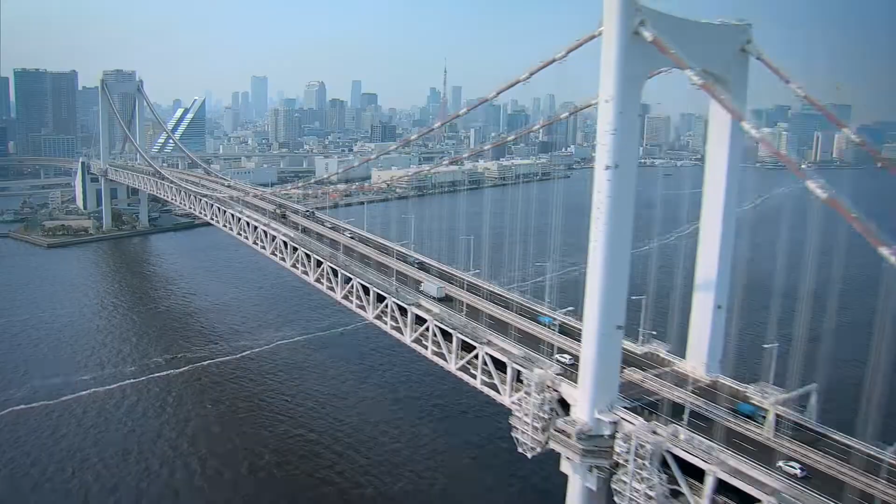Expressways support daily lives in the capital. 1 million vehicles flow in a day. The Metropolitan Expressway is a main transport network for the capital.

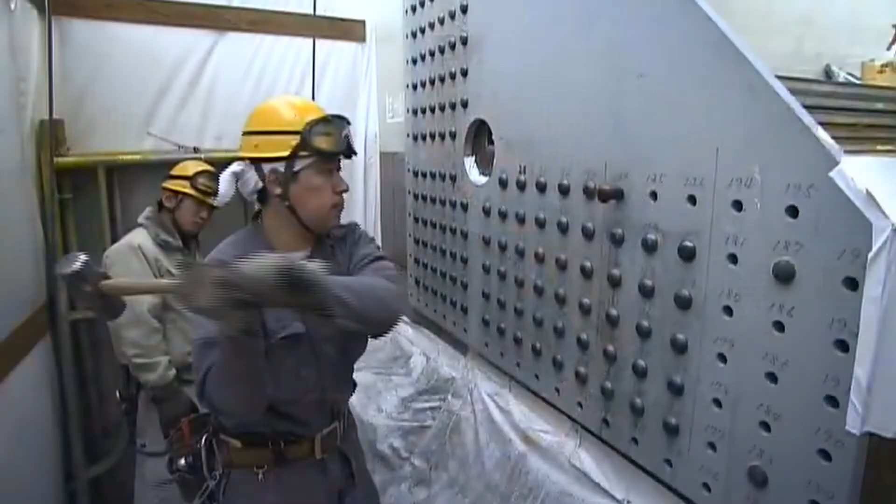The people maintaining the expressway every day are engineering staff. However, there is one more location that helps with the maintenance of the expressway.

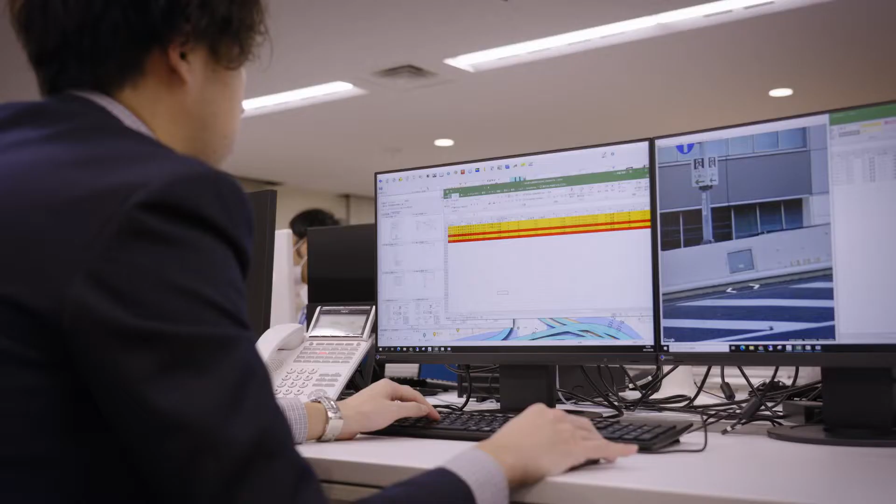Take a look at this normal-looking office. This is the computer system the staff use. On these computers, you can see the expansive network of the expressway.

The system that makes this possible is called iDreams. It offers functions helpful to anybody working in infrastructure.

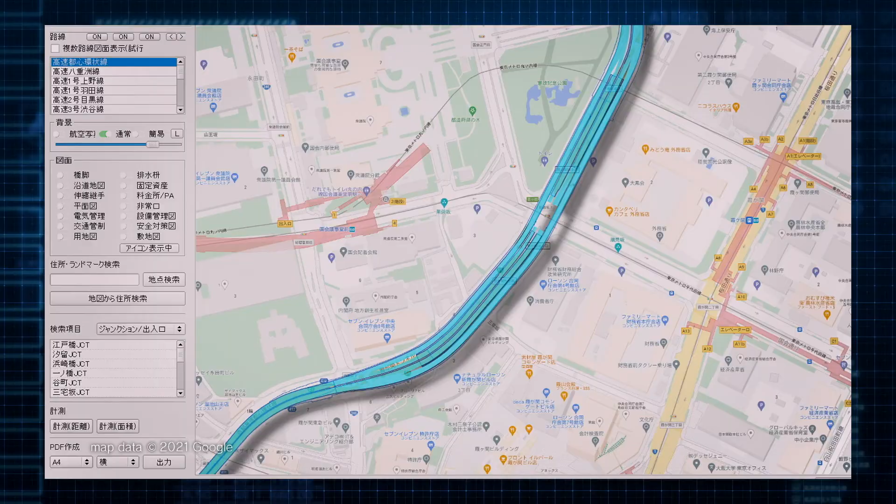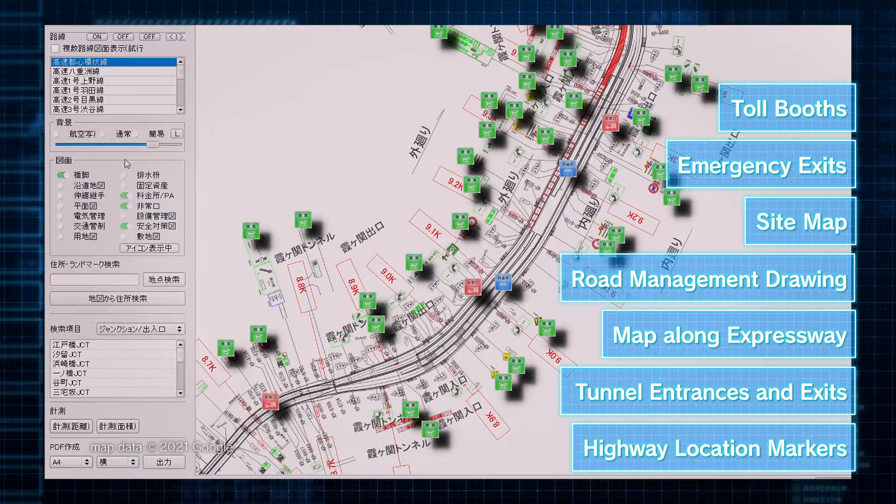With just a click of the map, information regarding damage, among others, are easily accessible. The system contains all information that is required for maintenance work. Let's have the engineering staff show us how this system actually works.

Expressway maintenance requires inspection, diagnostics, repairs, reinforcement, and records. Maintaining this cycle is vital. Each process uses the iDreams system.

Let's look at how iDreams is used for inspection. Mr. Kaneko will be telling us all about it.

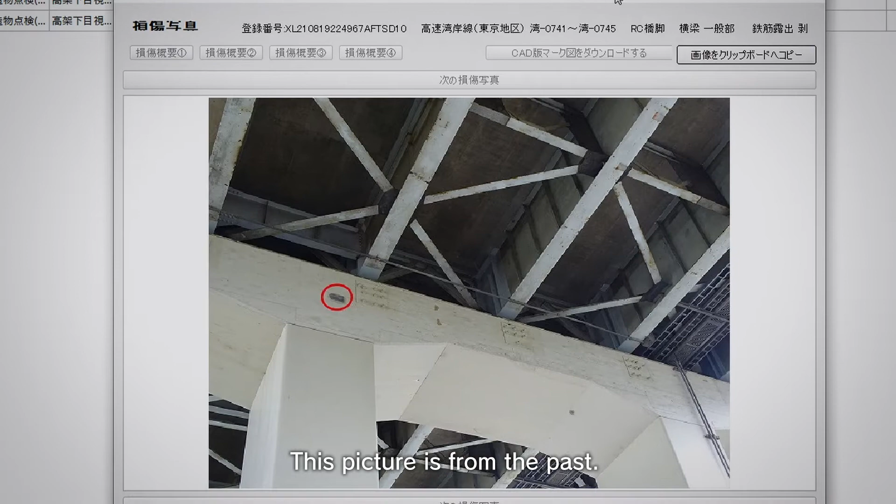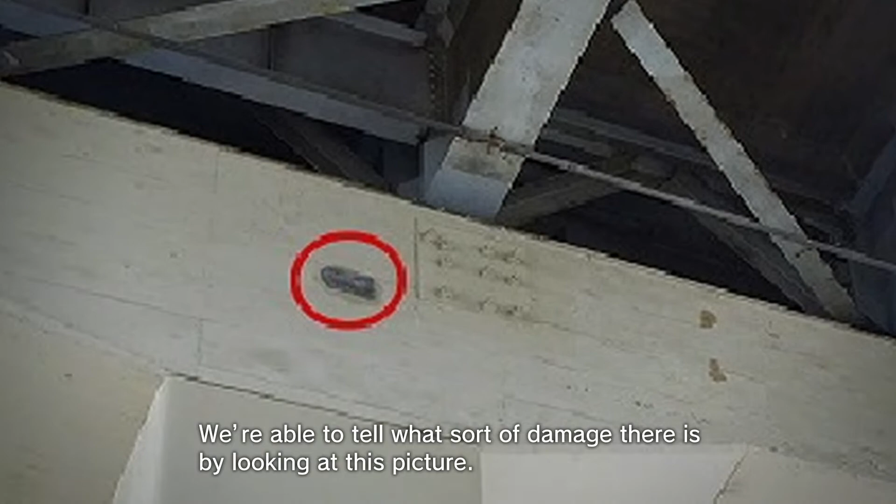Before he goes to carry out inspections, he can first learn the history of the location. iDreams can help through the completion drawing and the register search function.

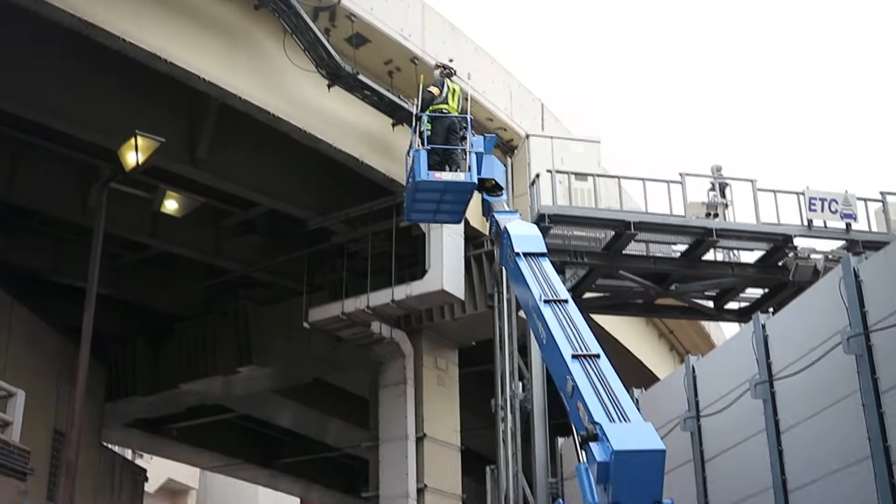The Metropolitan Expressway network has served the city over 60 years. The total length of the network now is 327 kilometers. 30,000 incidents of damage are found every year.

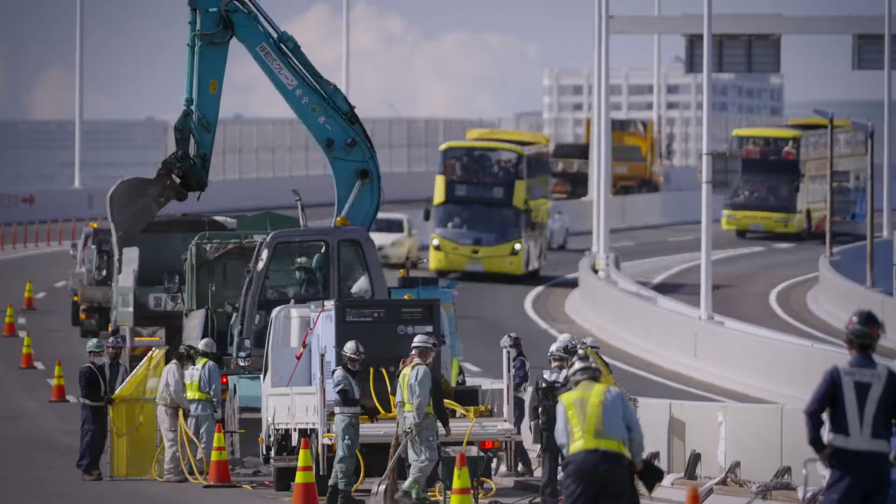When and by whom was it constructed and maintained? Knowing the history of the infrastructure is very important.

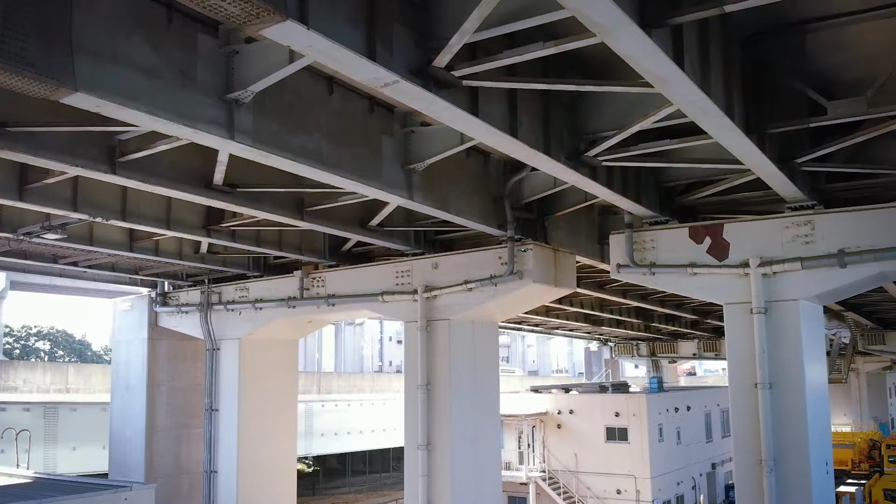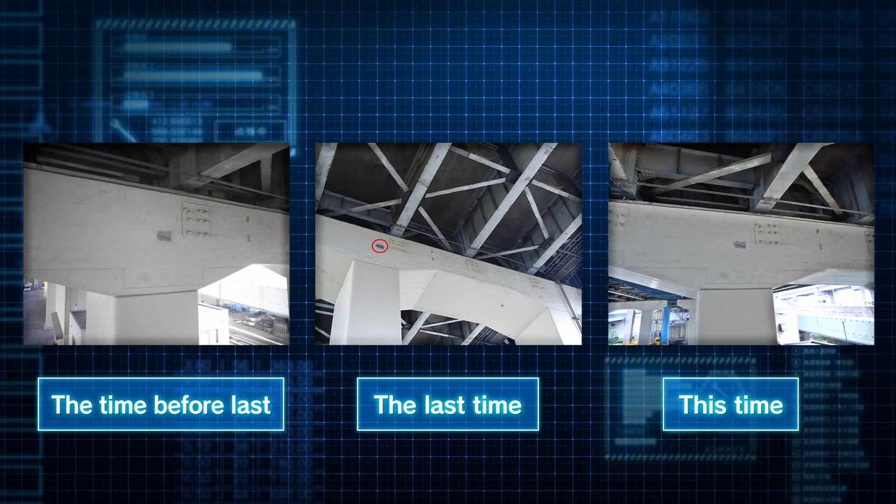By comparing the current status with past damage, the workers can see the changes over a period of time. This also prevents oversights during inspection.

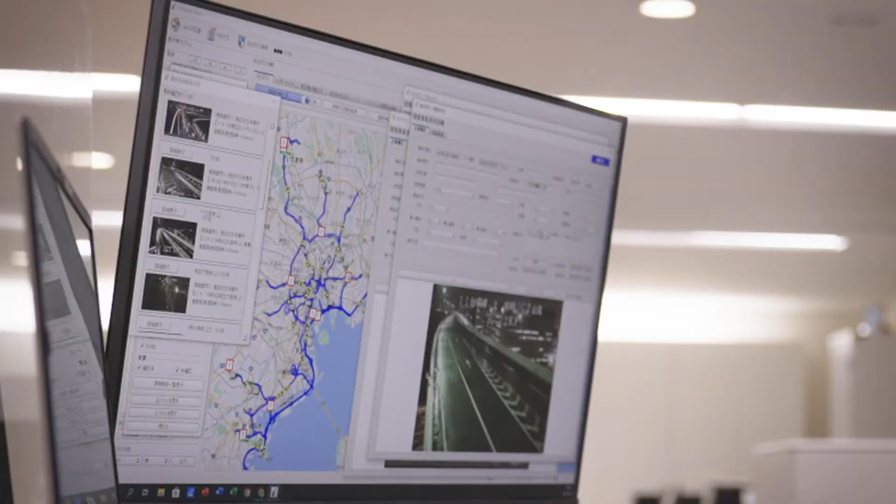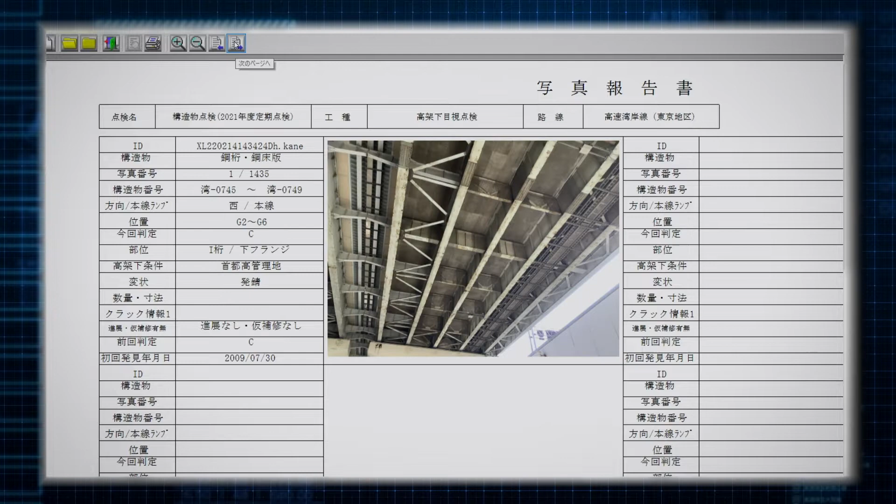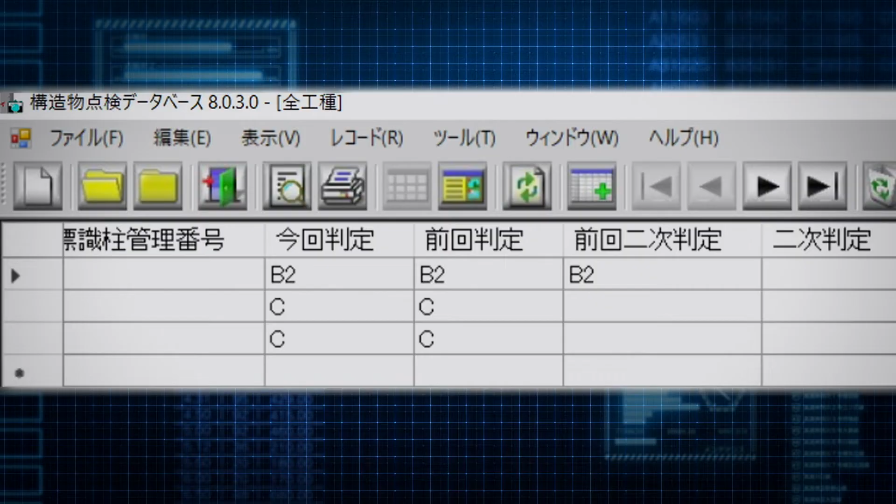This makes iDreams a database for continuous on-site management. The next step is repairs and reinforcement.

iDreams is useful for this process as well. For example, it helps create repair plans.

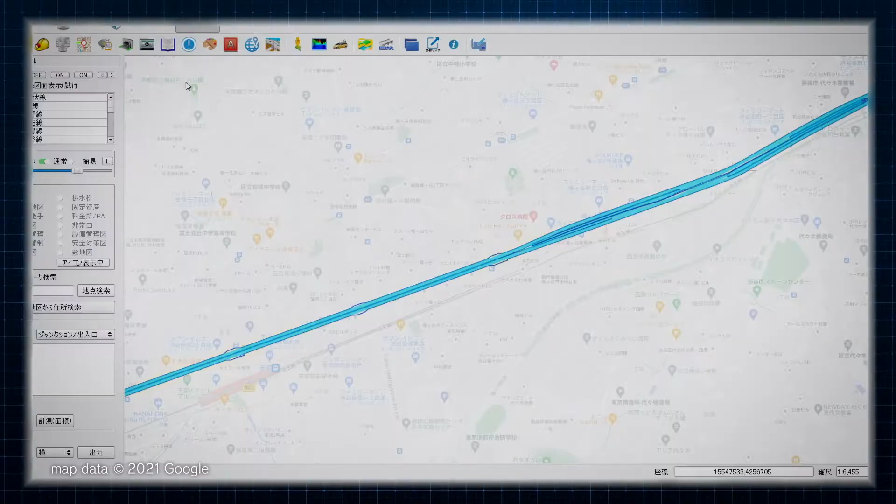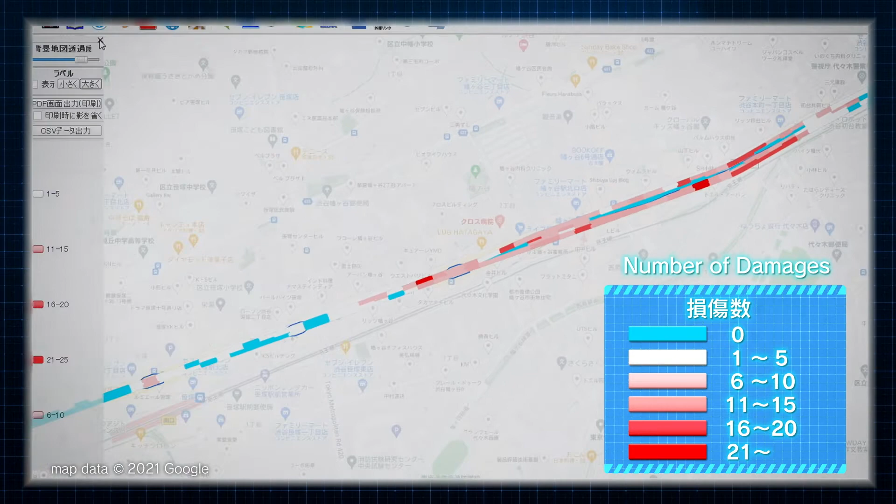Let's look at the concrete damage for the route number 4 Shinjuku line. The inspection data shows the number of damages for the entire line and ranks them by color. Workers can visualize the extent of repairs that are necessary and the priority for those repairs.

It also helps for planning. After planning, on-site work begins.

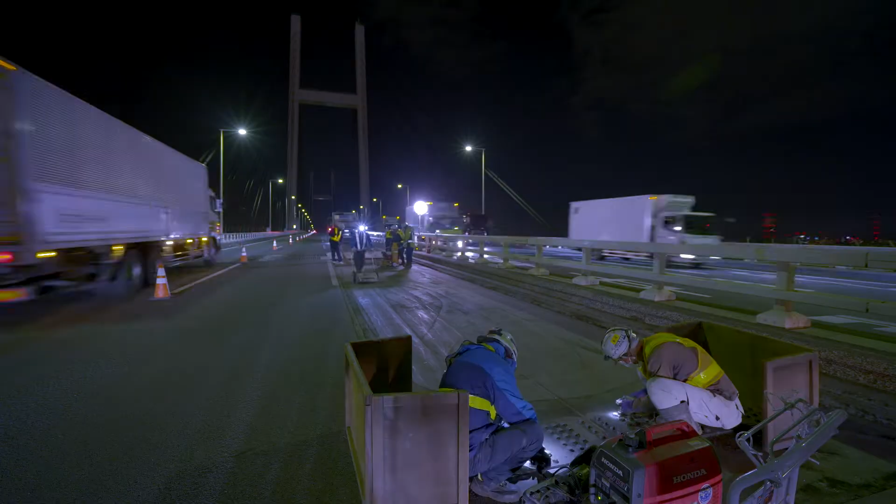However, the Metropolitan Expressway rarely sleeps. Vehicles pass by even at night. Without closing the expressway, they do repair work safely.

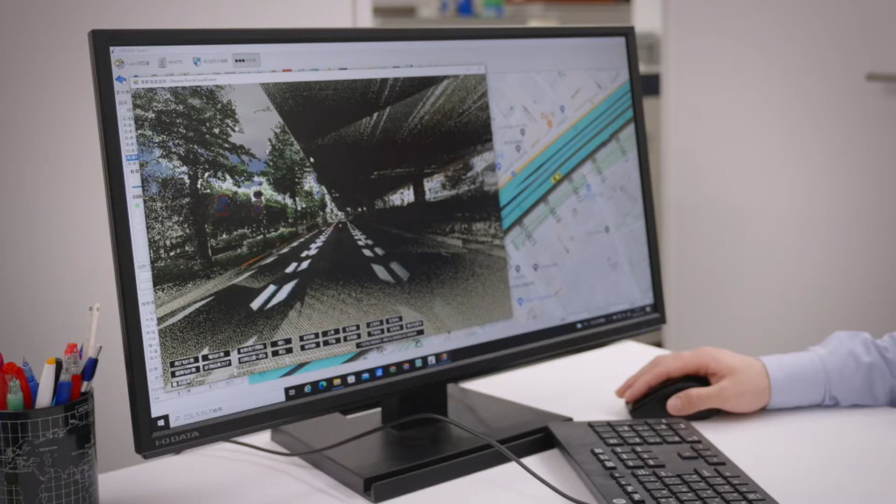Point cloud data is a collection of point data that has three-dimensional XYZ coordinates. The data is collected via laser beams on the expressway. It's highly accurate, with 1 million beams per second.

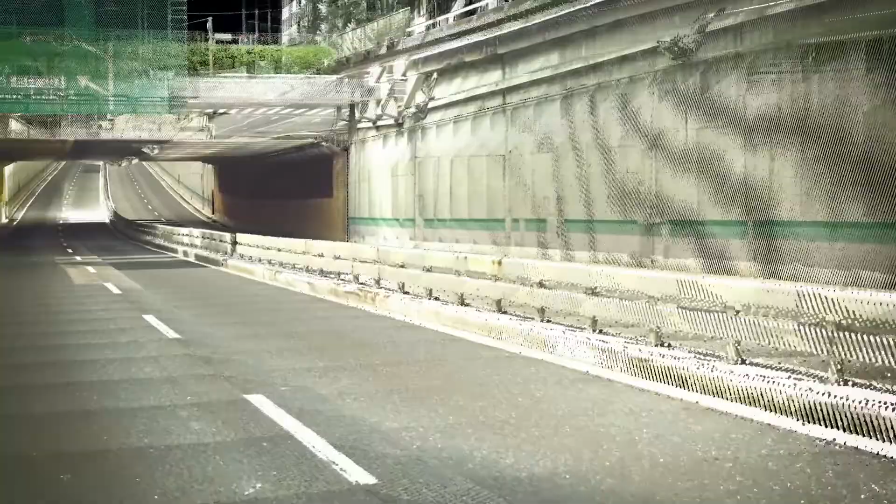iDreams has a model of the Metropolitan Expressway created by this data. The system also has data of nearby buildings replicated on the computer here.

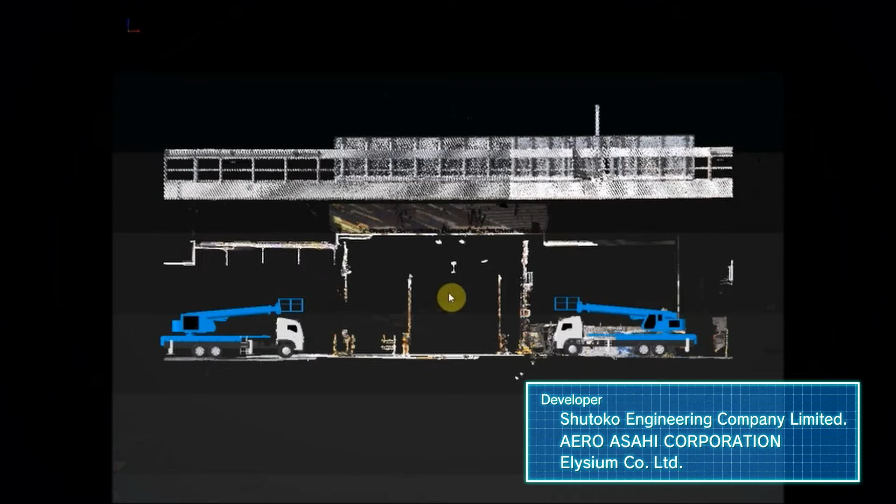They are checking the amount of space between railway infrastructure and the aerial work platform. A thorough analysis via iDreams allows meetings to be efficient and fruitful for all parties. Repair works can be done safely.

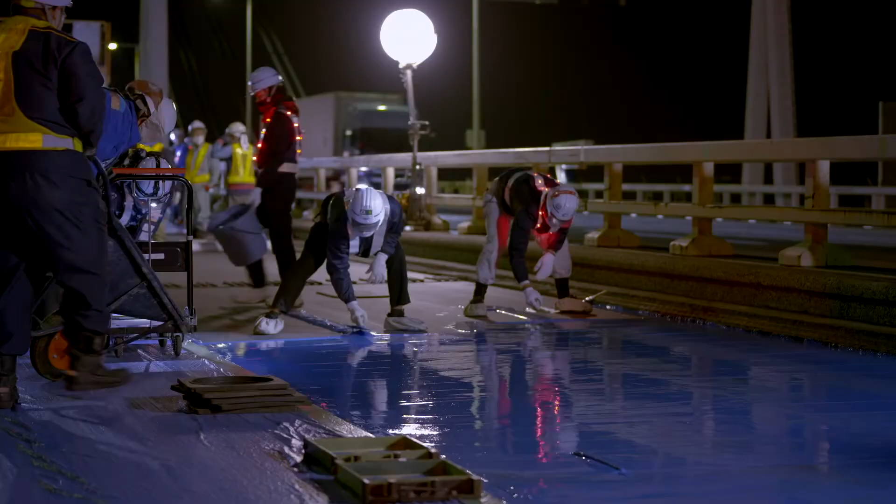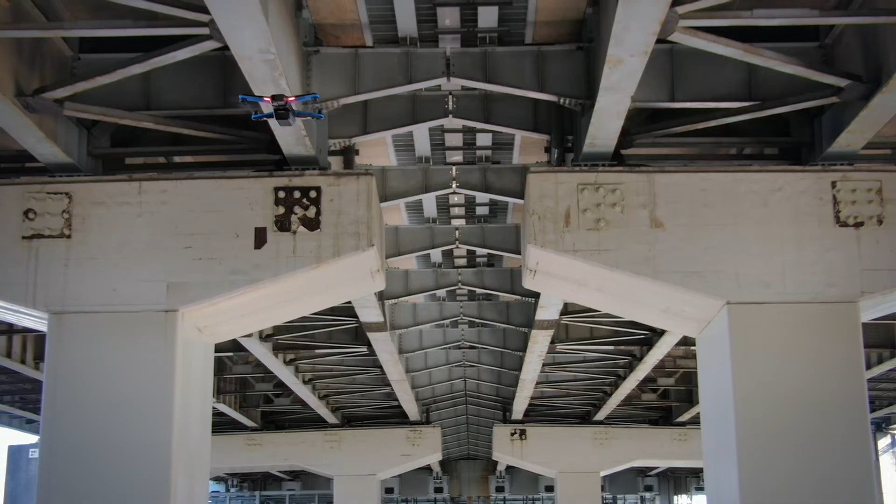The Metropolitan Expressway continues to service the city with its large network. Maintenance methods also continue to evolve. They're starting to try new things, such as using drones for inspection. Both expressway and infrastructure management will continue to progress toward the future.